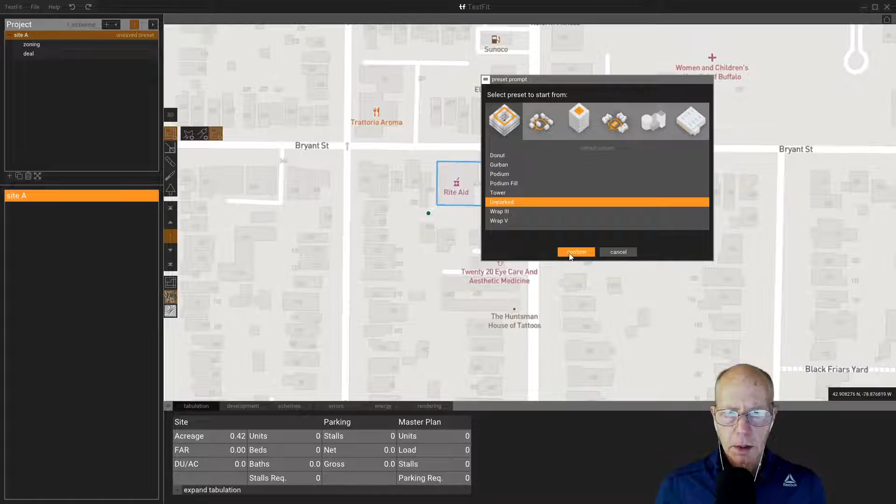And we're going to put an unparked 5-story building on it. I'll confirm that, and it's going to have some problems right away that we can hopefully correct here.

One is, you'll notice the little orange dotted line — that's the setbacks for the building. So if I go to zoning, I want to change the setbacks to 0, because in our community there are no requirements for setbacks for buildings.

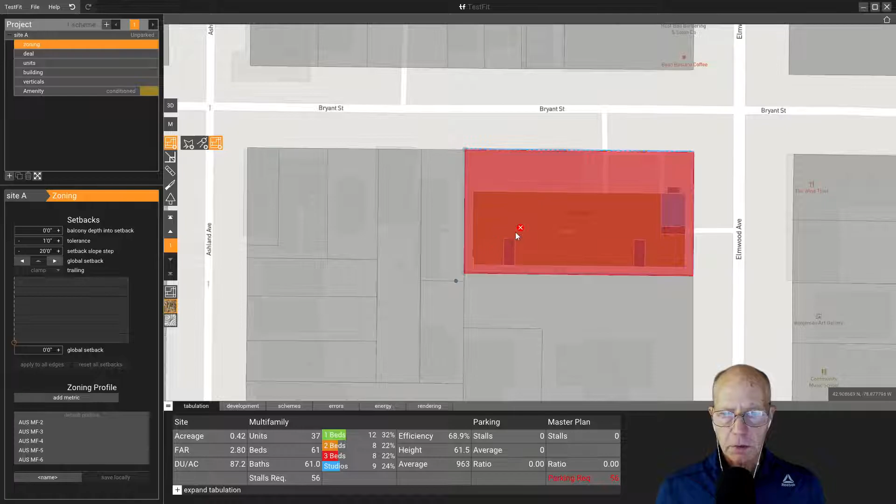So they don't have to be set back from the lot line. You can build right to the lot line, which you can actually see in these other buildings here. The building footprint and the lot line are basically lining up with each other.

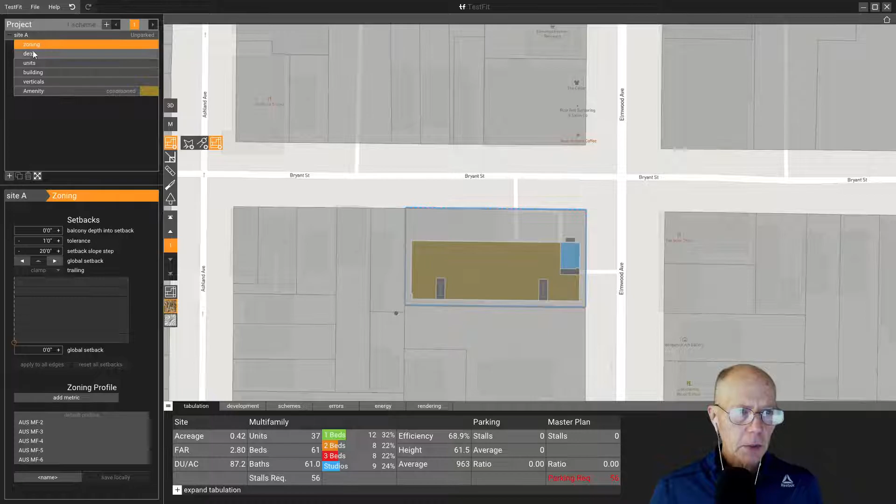So TestFit automatically still tries to create this amount of extra buffer space. I think if we go to the building, we'll get some options with where we set it on the site. I'm still not completely happy about the way this is laying out here.

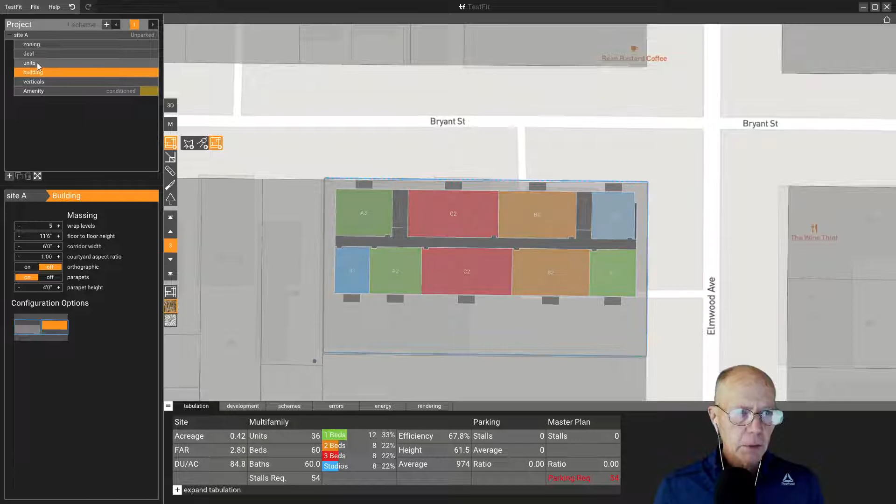But there's our idea of being able to — we're up on the 2nd floor, 3rd floor, that's our mixed units, we have our two forms of egress. If we go to the units, or the verticals, we can actually add an elevator on, and we could go to the mix of the units.

And if we change the mix of it, let's say we don't want any 3 bedrooms because we want to get more units in, we could take them completely out of the ratio altogether.

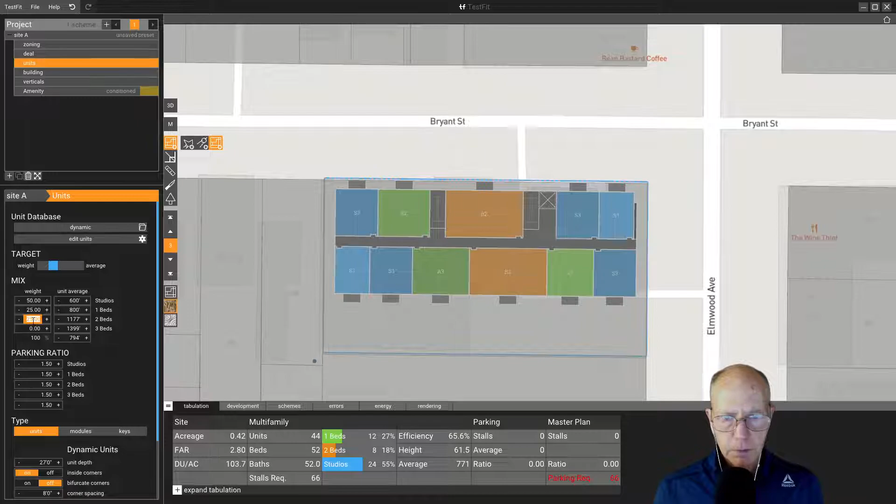And let's say we want it to be heavily weighted towards studios, and there we have a new mix of units within the building.

Now we might say, well, this doesn't wrap that corner quite well, and I don't have a quick solution for this, other than the idea that we might actually...

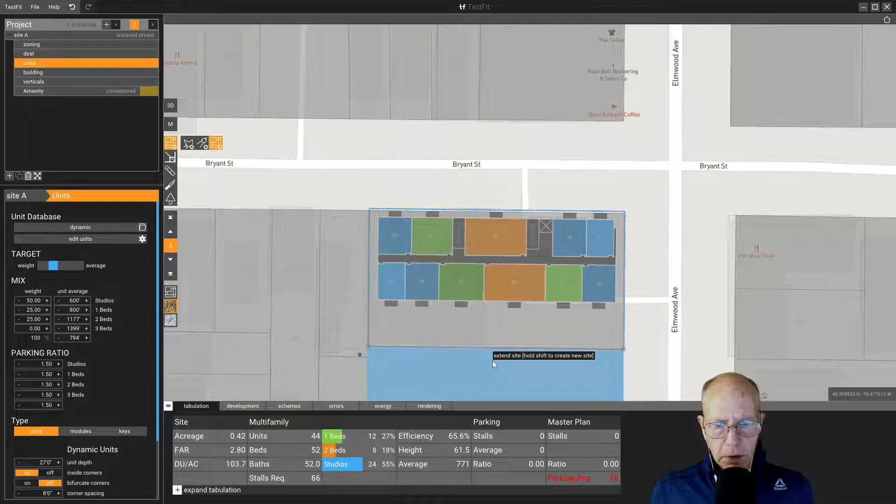Whoops, I don't know what I just did. I was still picking on parcels here. Hold on, let's see if we can get back to that.

We could look at maybe acquiring some extra property next door in order to give us that kind of a wrap with the building. Obviously this is kind of the first idea of a fix here. You might experiment with making some of these units a little bit smaller so we could get an extra one in here.

Let's see what happens if we go to the verticals and turn the elevator off. And I don't know if we can actually push this back at all.

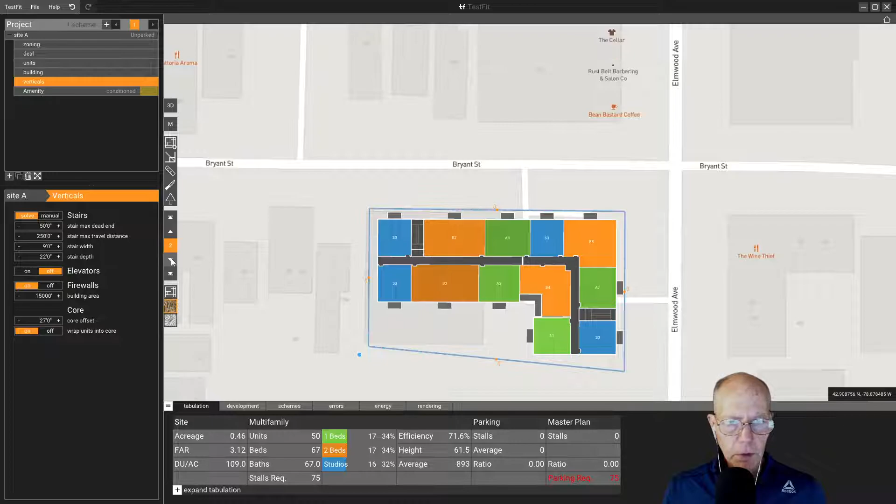All right, so that's the idea there. Now we have a building created on that floor plate, and we have a first floor amenity. If we go down to the first floor, obviously we don't want to put units on the first floor, so the idea here is we want to adjust that amenity.

So I'm going to go to the amenity and start upping the square footage until that's now all one retail space. And if you compare that to the existing Rite Aid, you'll notice it is actually probably even a larger footprint.

And the idea is that maybe with the acquisition of a little bit of land to this side of it, this could actually be parking and maybe have an entrance on the back side of the building at the same time for the Rite Aid.

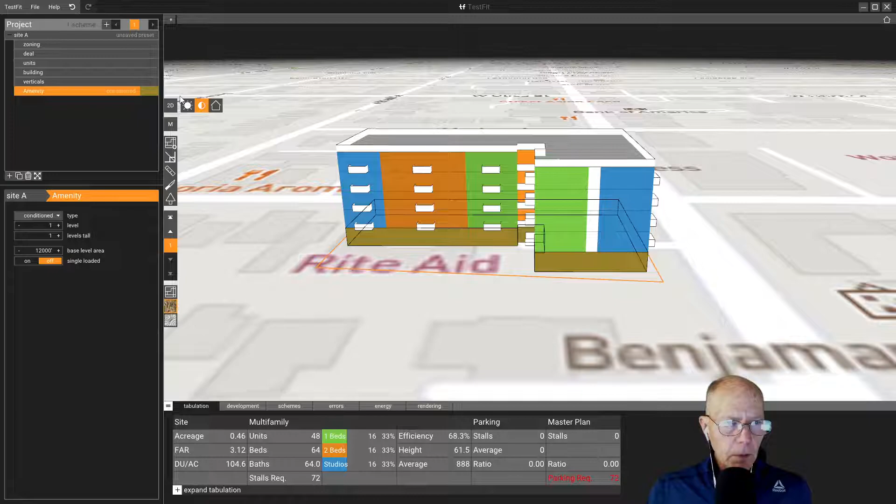And then let's take a peek at it from a 3D view. I think what I'd like to do here is turn the buildings on so you get a little bit of context, although it's not a great context because we're not really seeing any building height.

But the idea now is that we've kind of reinforced that corner with a building that now has development potential. For instance, we can say we can put 48 units there.

We have this kind of ideas about soft land cost and hard land cost acquisitions, the cost and expenses to build it, returns on investment. Maybe more than we want to know as architects, but this is a quick way for us to help our client explore possibilities they may have in developing a parcel.

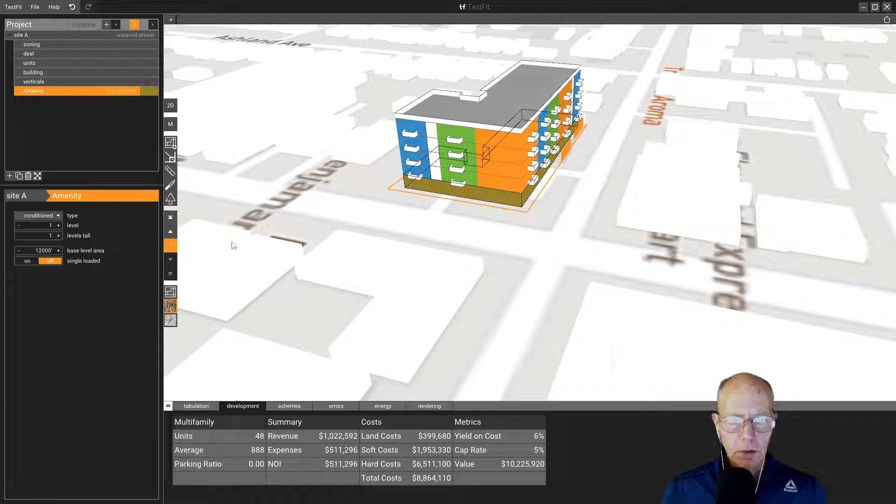So with that in mind, the last part will be to bring this into a screenshot of what you've done here into Revit for the third sheet of our presentation.

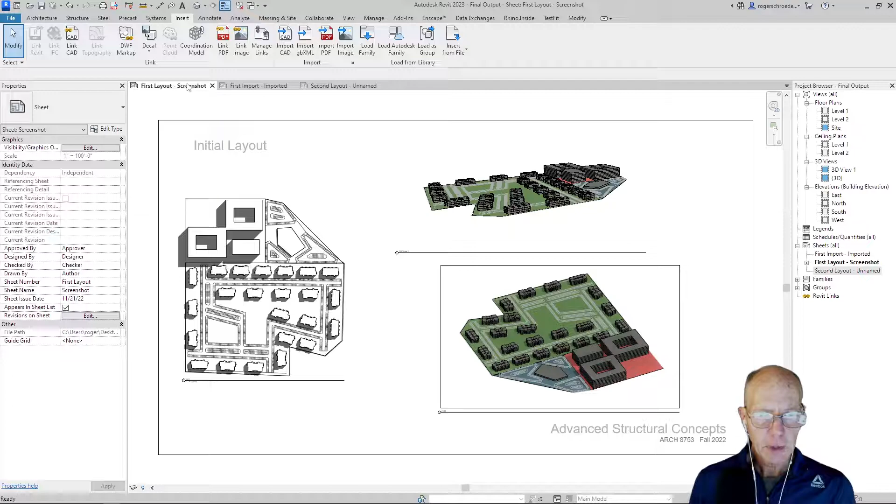So then for our final output, we have a second sheet layout, which is this kind of urban site that you've done. Hopefully also included is a more rural site or a campus site, and the demonstration that you've imported it into Revit.

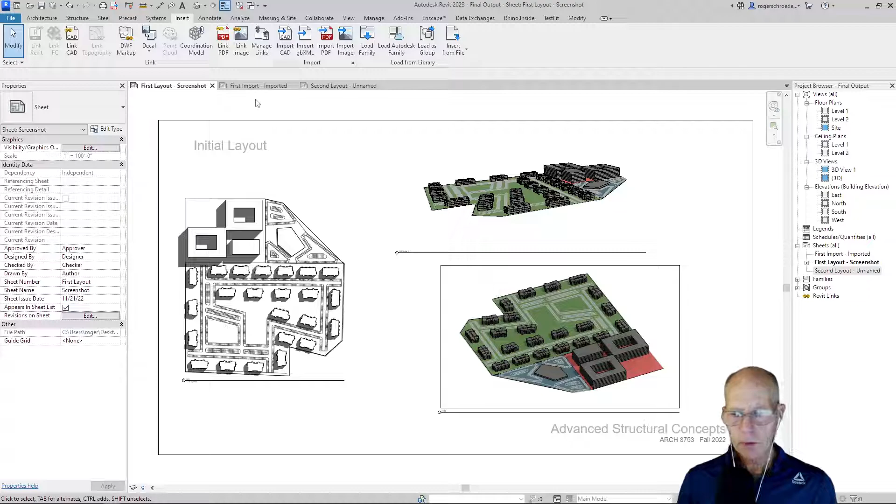So these are all just to show that you've gone through and experimented with TestFit, which is really the whole goal of the project. And if you have any ideas about wanting to embellish or improve upon it, you're welcome to, but it's late in the semester, and I know you've got a lot of other coursework going on right now, especially with studio and thesis. So this would be sufficient for this project.